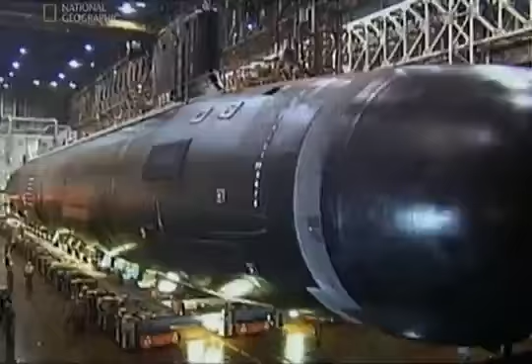The future of submarine warfare is here: the USS Virginia. Tricked out with high-tech capabilities that allow it to sneak up to a coastline and secretly watch and listen to potential enemies, ready to respond with unwavering force.

This mega-sub is in a class of its own: the all-new Virginia class. This is an amazing ship. Named the USS Virginia as the first of a new class, this amazing sub has staggering capabilities. It's the most advanced and versatile submarine in the world. We consider this like the Ferrari of the subclass.

It can launch attacks on other vessels using devastating torpedoes and can deliver cruise missiles 1,600 kilometers inland with pinpoint accuracy.

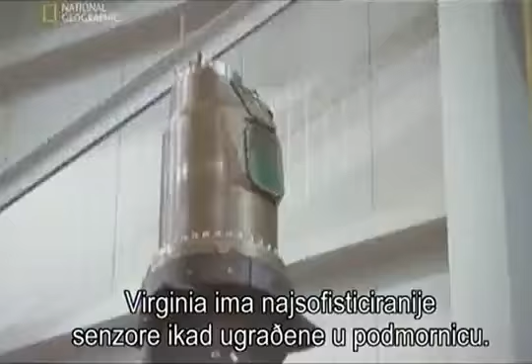To escape potential enemies, the USS Virginia can dive to depths of up to 240 meters. But what elevates this new supreme sub to a class by itself is its astonishing spying ability. This sub has been called the ultimate eavesdropper, and for good reason. The Virginia has the most sophisticated sensors ever fitted on an American submarine. It can see and hear better than any US sub ever built.

But even with such technology, the Virginia must get in close to potential enemies. And she does, extremely close. She uses a revolutionary automatic navigation system, which allows the Virginia to inch itself through shallow waters to an exact coordinate. The question for a Virginia is how slow can you go? How well can you take that 8,000-ton submarine and control it in coastal waters a couple feet off the bottom? Can you move that ship inch by inch?

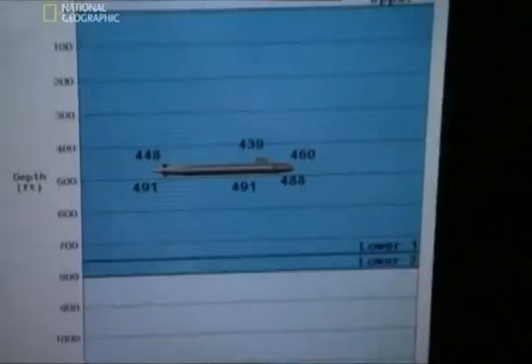Like a stealth fighter, it has the ability to remain undetected. But unlike the stealth, the Virginia can stay motionless underwater for up to 3 months if needed. And we could be sitting there for days and weeks and years and you'd never know we were there. This is a sub like no other.

With such covert potential, the Virginia's intelligence gathering is second to none. It can also deploy elite forces like Navy SEALs at a moment's notice. Such adaptability makes this sub one of a kind.

And the USS Virginia is one heavy sea creature. At 7,800 tons, it weighs as much as 1,600 killer whales. This monster sub is 115 meters from stern to bow. If you were to lay the Statue of Liberty down next to it, the Virginia would still outstretch it by 22 meters.

But how does such a beast move so effortlessly underwater? The dynamic thrust of this megastructure is a nuclear reactor. The design and operation of the reactor is top secret. But what we do know is that it's an astonishing powerhouse.

A compact nuclear reactor converts seawater to steam. The supercharged steam then spins the massive turbines, which in turn propel the sub. The reactor also powers all electrical needs for this high-tech super sub. And what's more, the nuclear reactor on the Virginia has a 30-year lifespan, translation, it can go that long without ever needing to be refueled. That's twice the average lifespan of nuclear reactors on other US attack submarines.

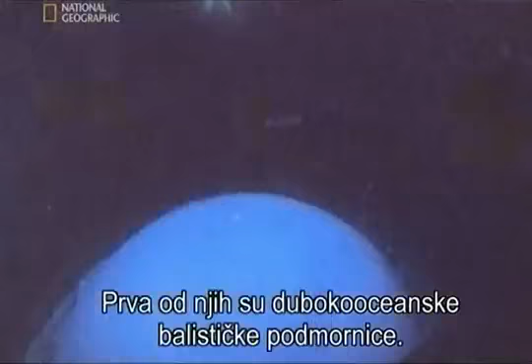The other type is the attack submarine. These are designed to move fast, sink vessels, launch cruise missiles, and gather intelligence.

Before Virginia, the state-of-the-art in attack submarine design was the Seawolf class. The cost to design and build the first Seawolf submarine was over $5 billion US. It was developed during the Cold War for potential deep ocean battles against the mighty Soviet Navy.

But in the early 90s, the political climate dramatically changes. Almost overnight, the Soviet Union collapses. America's archenemy has simply disappeared. The costly arms race between the superpowers is no longer relevant.

In this brave new world, it's inevitable that defense budgets are slashed. Every division of the military is a target for cuts. Submarines like the Seawolf class are simply no longer needed.

As the 1990s develop, new enemies of the United States and her allies emerge. Small terrorist groups in tyrannical countries like Iraq and Somalia cause the military to rethink spending. If you look at the threats we're dealing with today, a lot are coming from third world countries, small countries, where we need to take the battle to them and prepare a battle space around their coastlines. What is the point of a huge navy if these terrorist armies have no sea power? Why does the US Navy need a submarine at all?

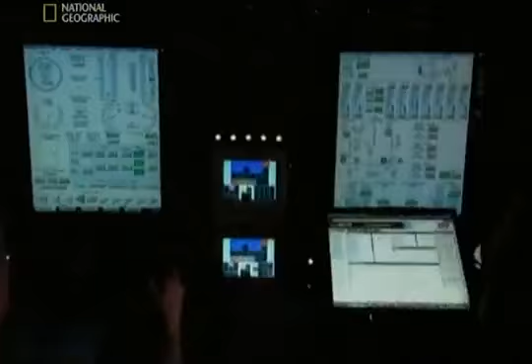In fact, submarines have a lot to offer. The Navy is aware that if they can harness new but unproven technologies, the submarine could remain in shallow waters completely undetected. And what's more, the super spy could stay there for weeks, even months. If a new megasub can listen and stay close to enemy lines, it can still be an important military asset.

In 1995, the US House and Senate finally agreed on the Navy's plan for a new class of attack submarine. But the Navy has set strict guidelines for the submarine designers. The new class of sub must have awesome spy capabilities. She must negotiate shallow waters with pinpoint accuracy. There, she must remain motionless for days on end, regardless of currents and sea drag. She must be able to deploy high-tech weapons to rain on an enemy whenever needed, and she must also be able to dispatch elite special forces like Navy SEALs. The new super sub must have stealth-like maneuverability and be able to disappear underwater for up to 3 months at a time.

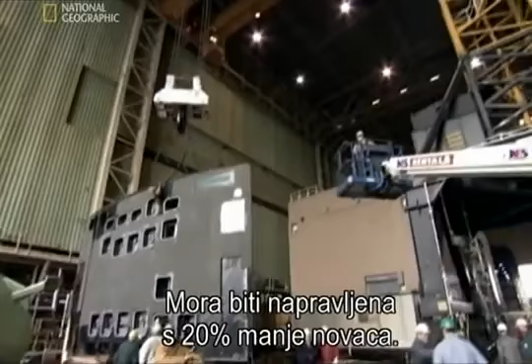It's a tall order by any standards, but there's a catch: they have 1 year less than it took to build the first Seawolf. And incredibly, there's an even bigger catch — it has to be made for 20% less money. With such constraints, there were many in the submarine industry who thought it was simply impossible. I think the reaction is always one of, how can we do that? We've never done it before. If the Navy can make this work, it'll provide a major new weapon in the US arsenal. But if they fail, all US subs could be in question.

It's 1996. The US government needs to get up close and personal with new terrorist enemies. The Navy insists that submarines can still help in this thorny urban war. They claim they can build a new class of submarine — bigger, better, quieter, and more deadly. But there's a catch, a big one: it must be built in less time and for a great deal less money than the previous attack submarine, the Seawolf class. With such limitations, this project looks more likely to sink than float.

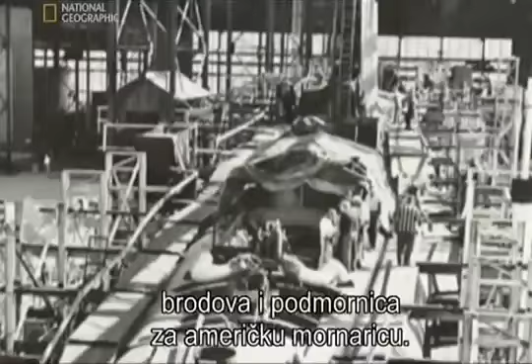The Navy decides to offer the mammoth design challenge to a trusted company, Electric Boat. Based in Groton, Connecticut, this company has enjoyed bragging rights that span over a century of ship and submarine building for the US Navy. The first sub they built was the USS Holland for the Navy in 1900. The USS Holland revolutionized the US Navy, marking the beginning of more than a century of military submarine building. Electric Boat's expertise is second to none, but some government officials already fear that this massive challenge may simply be impossible.

Despite the huge red flag, Electric Boat finally agrees to design and develop the new Virginia class. But to bring it in more cheaply than the Seawolf, they'll have to completely change the way submarines are built.

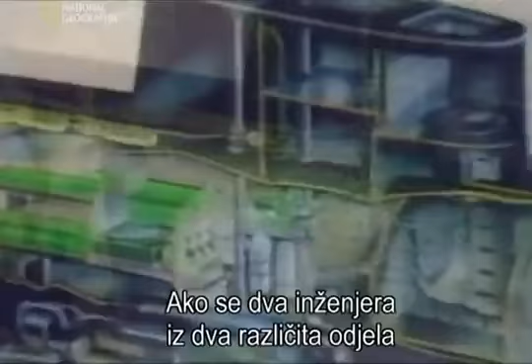It starts with paper and wood. In the past, they would have drawn up initial plans on paper. Previous classes of submarines were designed historically, like probably any other large construction project, with two-dimensional drawings, blueprints. But the problem with two-dimensional plans is that different designers can't always view each other's layouts. If two engineers from different departments end up competing for the same space, it could lead to lengthy and costly delays.

On this tight schedule and budget, there's no room for such error. It'll put the project behind schedule even before it started. It could tip the balance and mean the end of the new super sub.

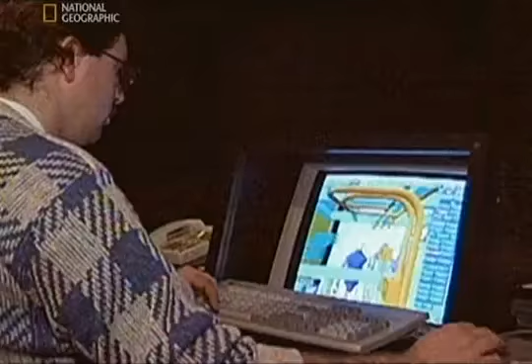The team needs another solution. They turn to new computer-aided technology. The benefit being that the whole model can be seen in 3 dimensions. This will mean that each department can quickly see what the other is doing. If it works, it'll save the company a fortune and help design a more efficient sub. But if it doesn't work, it could mean the new super sub is doomed from the start.

The president of Electric Boat finally decides to take the risk. He came in and finally took all the drafting boards out of the plant and said, okay, go for it on your computers.

Before the Virginia class, when a submarine was designed on paper, builders would then construct a life-sized wood mock-up of the plans just to make sure everything fit. But with the computer-aided design of the Virginia, that step could be skipped. All of the test fitting could be done right there on the screen. It is the first time that a US Navy submarine is completely designed via computer.

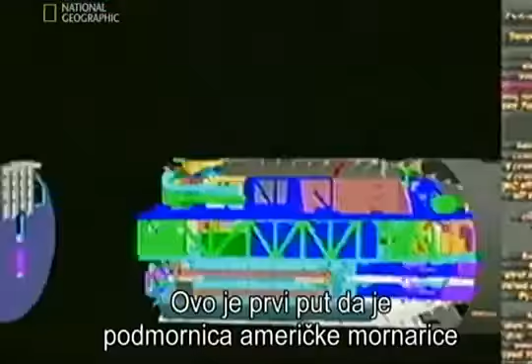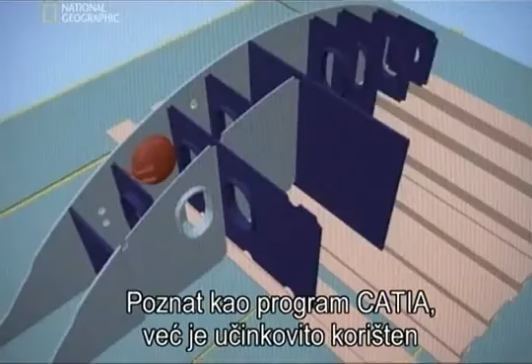And the program that would make this computer-aided design possible is already proven technology. Known as the CATIA program, it has effectively been used in the development of airplanes by the Boeing Corporation. Electric Boat figures there are enough similarities between a plane's fuselage and a submarine to take the plunge.

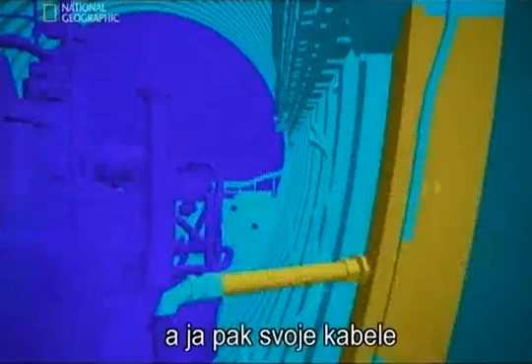It proves to be the right decision. All the various designers have access to the computer 3D model. This allows engineers to work in the same virtual space at the same time. Designers can now view all the plans to make sure they don't interfere with other layouts. The piping designer is running his pipes and I'm running my cables. We can go in and detect interferences day by day.

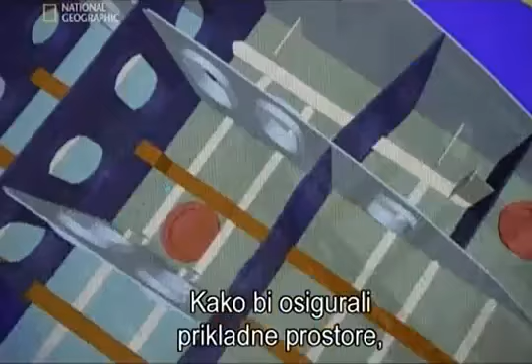Every part of the ship is scrutinized for function and economy. So creating the sub on a computer seems to allow for the more efficient test fitting of systems and parts. But the next challenge facing designers is figuring out how to create spaces for people. Workers need room to do installations, and sailors need space to do their jobs. So in order to ensure those spaces are adequate, designers welcome the help of this guy.

Meet ErgoMan. ErgoMan is a computer-generated image of a human being that comes in 3 virtual sizes: 1.7 meters, 1.8 meters, and 1.9 meters. Whatever movements a human can do, ErgoMan can replicate. Then, when the ergonomically correct envelope has been pushed and movement is made that is not humanly possible, ErgoMan clearly lets engineers know by simply turning that body part red, enabling the designer to adjust the space he's working on.

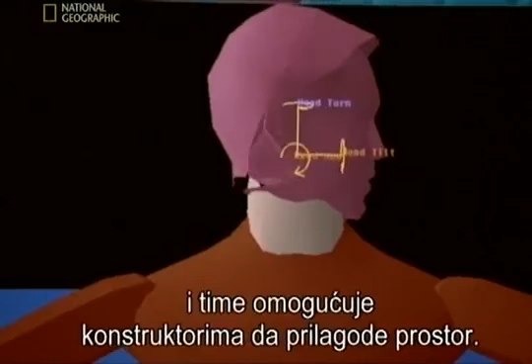This revolutionary technology could save the company millions in costly redesign. It could also guarantee that the crew will operate at maximum efficiency. The computer-aided design also helps in one other crucial way. The future of warfare is uncertain. To meet that uncertainty, this incredible sub must be able to adapt to new situations. As modern warfare changes, so the Virginia must adapt to meet it head-on.

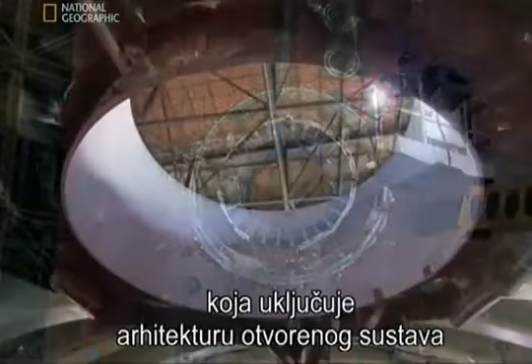To create this adaptability, the designers of this super sub create what's called a modular design that incorporates an open system architecture, meaning the skeletal structure of the sub includes large open spaces. These open spaces can house prefabricated modules such as weapon systems or sonar technologies. These modules can easily be inserted as one complete unit.

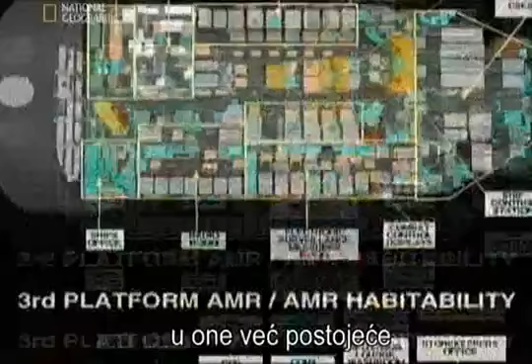This modularity will allow future versions of the Virginia-class to house newly developed systems in the existing Virginia-class layout, without the added expense of having to develop an entirely new class of submarine to house new technologies and capabilities. A remarkable cost-cutting development in the design of a submarine. If it works, this will be the most extraordinary submarine commanding the world's oceans. But designing it is just one problem. Making this ambition a reality is quite another.

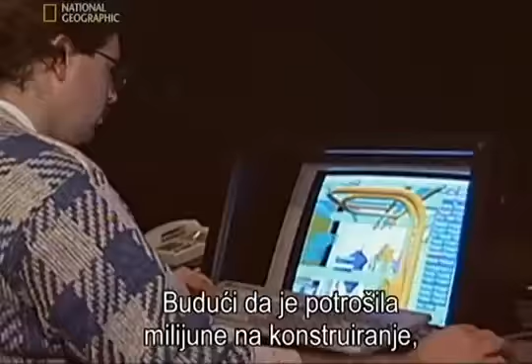With an even tighter budget than past submarines, this is going to be a massive challenge to execute. And now there's a new problem. Having spent millions on the design, the Navy may not have enough money left to build it. It looks like the prototype of the new Virginia class may never surface.

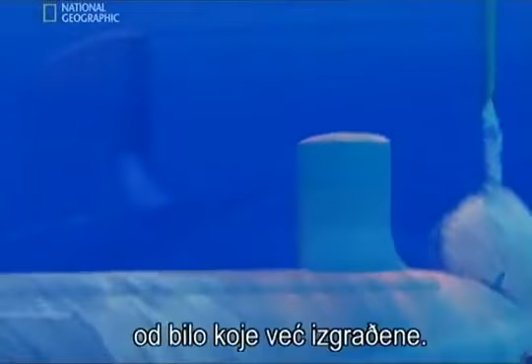The Navy is underwriting an enormous new project to build a new class of submarine that'll be more versatile than any ever built. But it has to be constructed in less time and for less money than the previous attack submarine, the Seawolf. The design and development have been skillfully and successfully carried out by Electric Boat. And for the first time, a US Navy submarine is completely designed via computer. It's a massive achievement, but there's a problem.

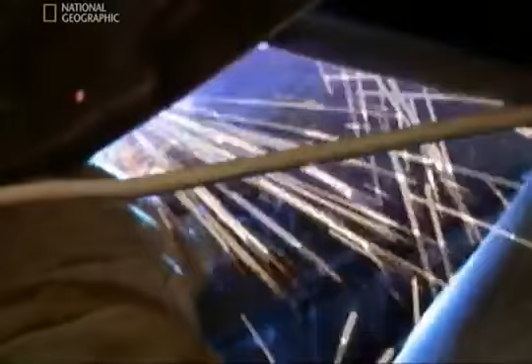The Navy's budget for the Virginia program is running out. It could lead to the end of the new super sub before it's even floated. But then Electric Boat does something unprecedented in its history.

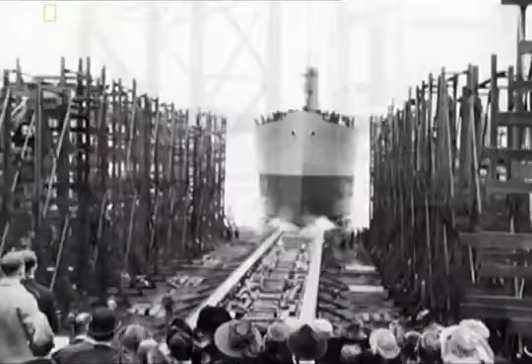For years, Electric Boat has been in competition with Northrop Grumman's Newport News, another heavy hitter in the shipbuilding industry. Now Electric Boat proposes that they combine forces with their old rivals and do something that's never been done before: build the submarine together, a process they call teaming. They figure that combining resources and brainpower will allow them to work more quickly and more efficiently.

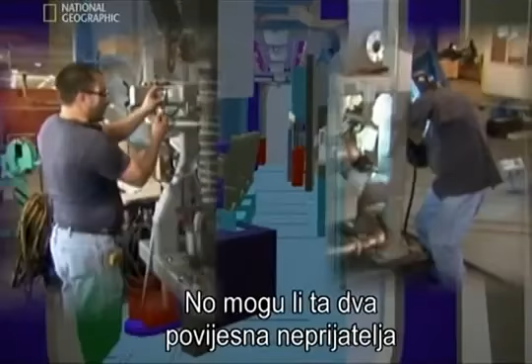The proposed alliance can lead to massive savings, $700 million off the cost. But can these two historic adversaries put aside their differences and build a super sub for a reduced price? How can they manage such a massive project across two companies? As we've said, it's never been done before. But the Allied companies must make it work. They have little choice as the Navy has no more money to offer.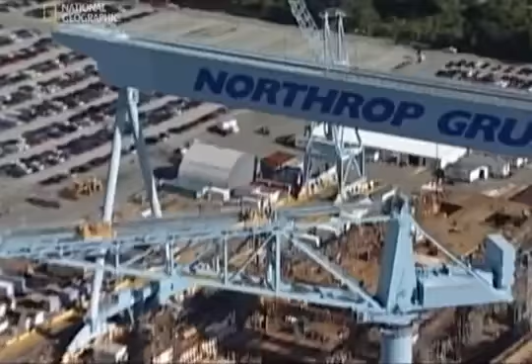Making a super sub for less money and in less time than previous attack subs will only be possible if the two rivals collaborate. It's a colossal and dangerous undertaking. If they get it wrong, it could spell the end of the US submarine program.

This is a time when the Navy must prove a submarine's worth in a changing world. The two-company alliance agrees that the only way to meet such demands is that there can be no delays. A major setback could erase any cost savings. But such efficiency in submarine construction is unprecedented. Is this project simply too ambitious? Could it be destined for the deep?

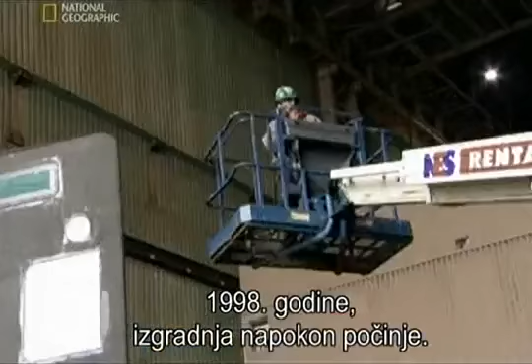In 1998, construction finally begins. Like all submarine building, it begins with the most crucial component, the hull. This is where the crew and weapons are housed. If it's not strong enough, the lives of hundreds of men are at stake, as is the multi-billion-dollar submarine. Not just a costly mistake, it would be a national catastrophe.

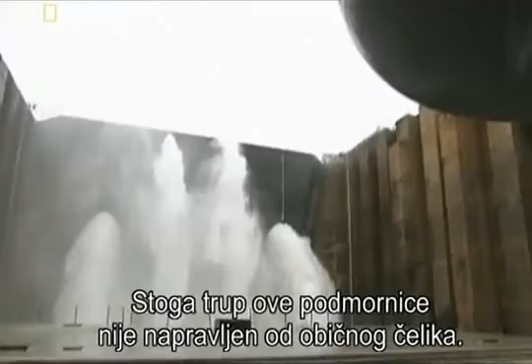Consequently, the hull for this sub isn't just made out of simple steel. It must resist unbelievable pressure. The Virginia class needs to reach depths up to 240 meters. Here, it's difficult for an enemy to find them. It'll give the submarine maximum safety from attack or detection.

But at these depths, there's immense pressure. The steel hull must withstand a massive 26 kilograms of force per square centimeter. That's the equivalent of a dinner plate strong enough to hold up to the weight of an elephant.

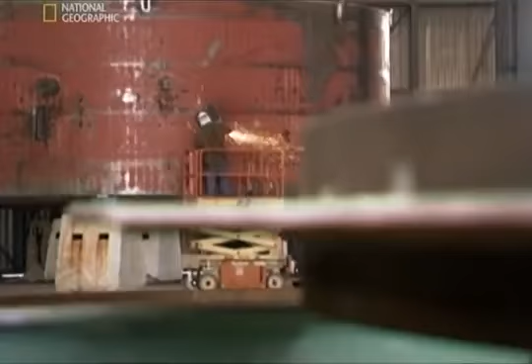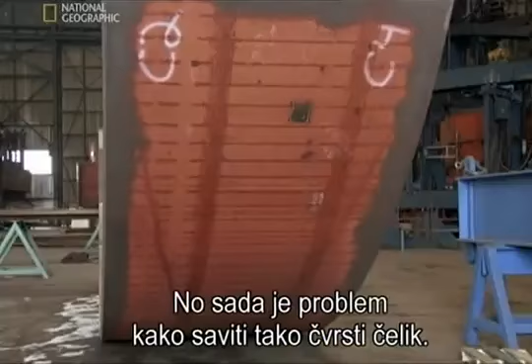Getting the steel strong enough to endure such pressure is crucial. The manufacturing of this special metal is a military secret, but suffice to say, it's strong. Extremely strong. But now the problem is how to bend such heavy-duty steel.

They use a machine that supplies up to 4,500 tons of pressure. That's over 30 times the pressure exerted by this car-crushing machine. The massive drum shapes and bends the huge plates of steel. Once bent into shape, the steel is mounted onto rib-like frames. It's then welded together into cylinders.

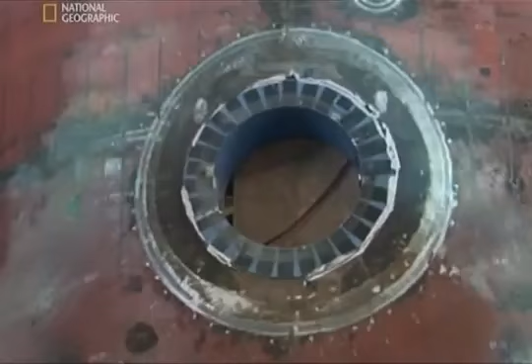This is a critical moment. In the past, this was done by teams of hand welders. But such are the stresses on a deep ocean submarine that even one bad weld could lead to disaster. There's only one answer: robots.

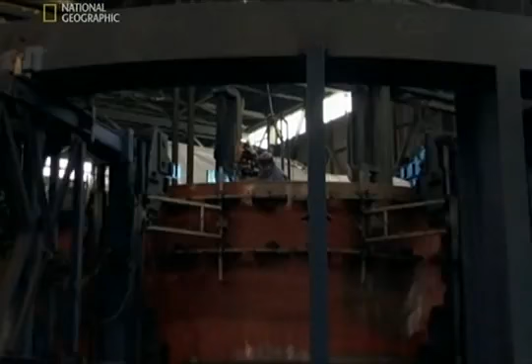These assembly robots can work round the clock and rarely make mistakes. The weldments that go in out here are better than 99% first-time yield, which means the inspection process is less than 1% failure rate. It's a costly business, but this is something that can't afford to fail at any price.

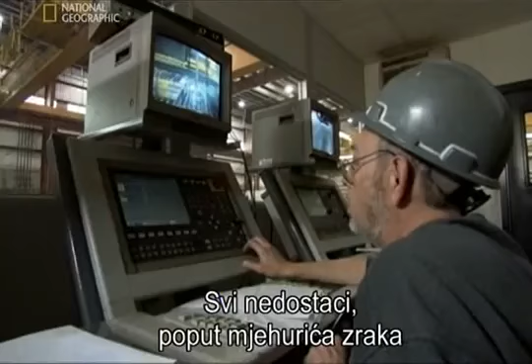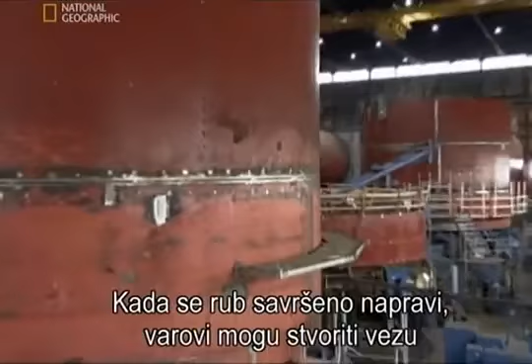To make sure the welds are perfect, they're inspected by X-ray. Any imperfection, such as an air bubble in the weld seam, could be just enough for the hull to weaken. It could then give way to the crushing forces exerted deep below the surface. If the X-ray machine shows up any imperfection, it's meticulously repaired. Amazingly, once the seam is perfect, the welds can create a bond that is actually stronger than the original steel. A comforting fact when you're 240 meters below sea level.

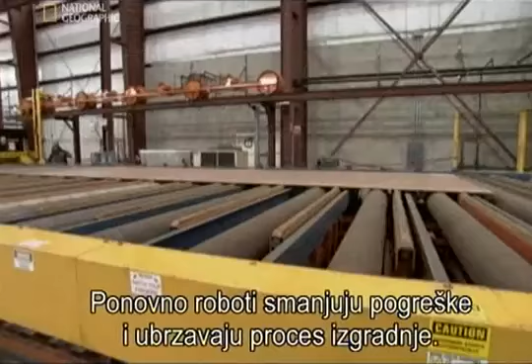Once the separate sections of the hull have been created, they start to construct the skeleton. Here in steel processing, they'll make floors, walls, and all the sections that comprise the submarine's framework. Again, robotic manufacturing reduces mistakes and speeds up the process. This is crucial when the alliance companies are desperate to cut costs and time.

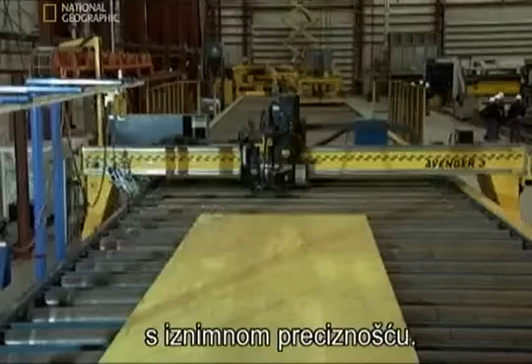Today, modern technology works with electronic data that comes right over the line and feeds the machines. This incredible laser marker is one of a new generation of robotic assembly tools, designed to eliminate human error. It's programmed to follow the computer design with better than pinpoint accuracy. It's basically the only marker of its kind in the free world that we're aware of.

But will this new technology work? It's never been used in submarine construction before. The machine passes quality control with flying colors, making it just one of many innovations in building this unique sub. So far, the project is going well.

Now the marked steel must be cut. But how do you cut such strong steel? They use a hugely powerful cutting machine known as an abrasive water jet, where a constant stream of water acts as the propellant for 80 grit flecks of garnet, which cut through the steel.

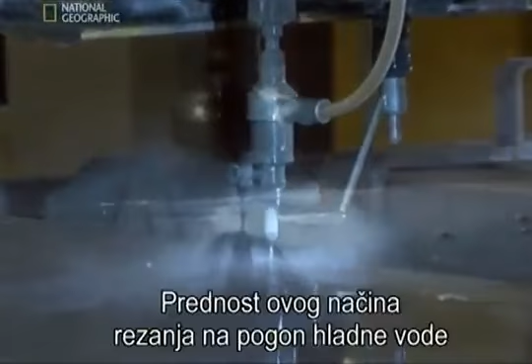The advantage to this method of cutting with a cold water propellant is that there is no heat-affected zone, thereby eliminating imperfections caused by expansion, contraction, and melting. Even though garnet is not the hardest abrasive that could be used, it's seen as optimal because it's hard enough to cut without causing too much wear and tear on the water jet's nozzle.

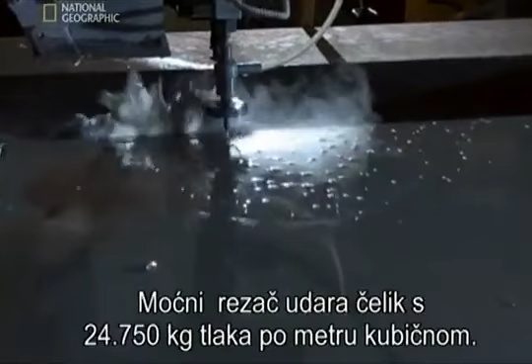The powerful cutting stream strikes the steel with 3,900 kilograms of force per square centimeter, strong enough to cut through a 30-centimeter thick piece of steel. Once cut, the sections are ready to be welded into place, making up the submarine's skeletal shape.

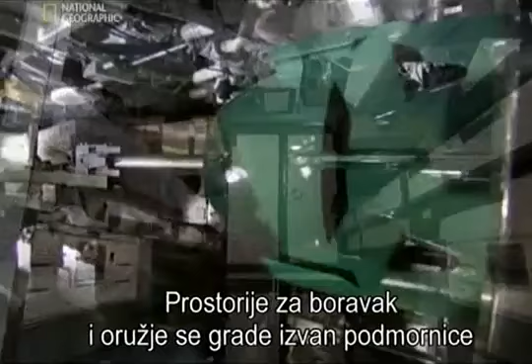While these sections are being built, other important modular sections are constructed in tandem. Living quarters and weapons are built outside the submarine before final assembly. This allows ease of construction, and each module can be rigorously tested before installation.

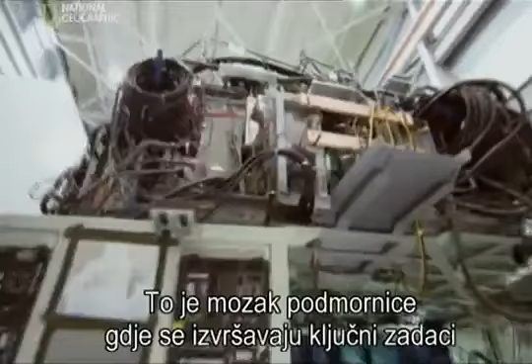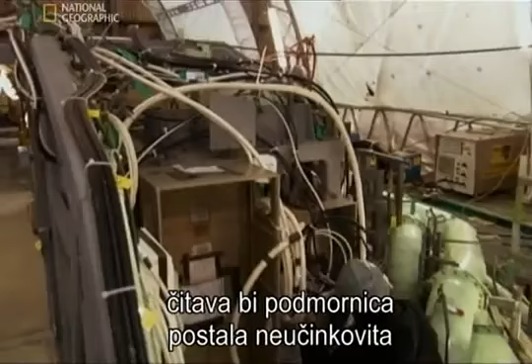The Virginia's command and control module is the most complex module to be built. It's the brain of the sub, where crucial functions are executed and surroundings are monitored. It's also where the awesome weapons systems are controlled. If any part of this goes wrong, the whole submarine could be rendered inoperative and end in a voyage to the bottom of the sea.

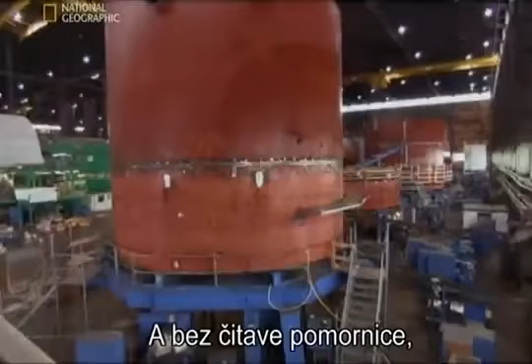So the Virginia's separate elements, the modular systems, the internal structures, and the outer hull are built with efficiency. But these separate sections have not yet been integrated into a complete submarine. And without a complete submarine, the sailors destined to serve on the Virginia can't set foot onto it and get a feel for its inner workings. Yet they must have a working knowledge of the Virginia's unique operating systems when they're charged with manning the complete submarine.

So how do sailors prepare for duty on board this unfinished sub? The Navy would have to get creative to ensure that the human element of this mega-sub, the US Navy submariner, would also be finely tuned for service. This is when the mission could sink or swim.

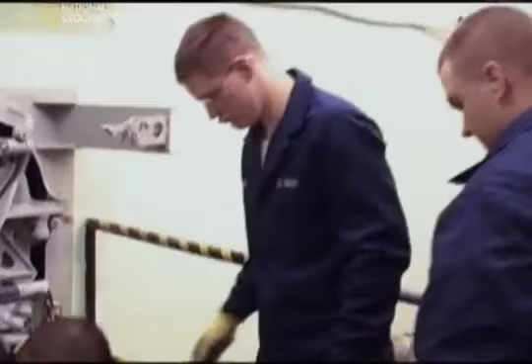The USS Virginia is a super sub in the making. Nothing like it has ever been built before, so there's no chance of gaining crew experience from other submarines. But the new sub must be fully tested before sea trials, and that includes the crew. To operate this new class of submarine will require unique training. But this is a virgin sub, and no one knows all its workings. Like the rest of this project, this too will be a challenge for the Navy to resolve.

Training begins with every submariner's nightmare, in mock facilities like this fake engine room, built to simulate a flood. Even though these men are not on an actual sinking sub, this scenario is very real to them. They know that a flood could happen when they're at sea, and the only way to survive it is to stop the water from rushing in. Flooding in the engine room!

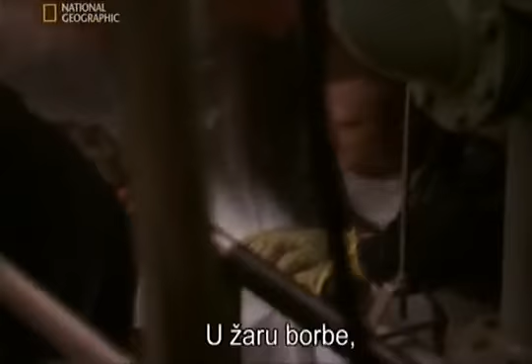When a sub starts flooding, it becomes a race against possible death for everyone on board. Flood control has been activated in the engine room. Phones are manned in damage control central. In the heat of battle, the sub can't resurface because the enemy will spot it.

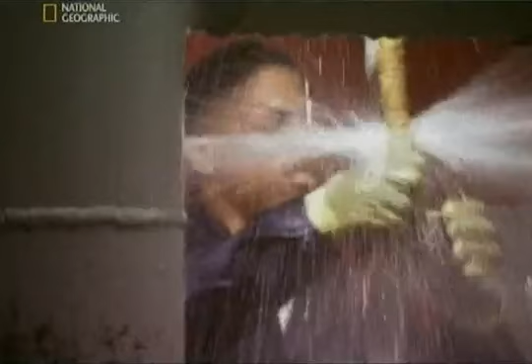If too much water gets in, the sub takes on too much weight, permanently ditching itself on the ocean floor. The men cannot escape through the hatch because they're so deep, the water pressure will crush them. If they can't stop the leaks, they will be trapped at the bottom of the ocean, buried alive in an iron coffin.

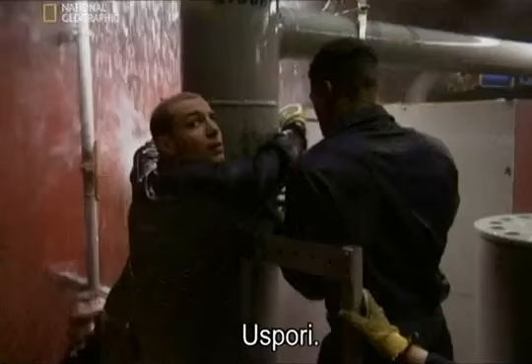These sailors are under the close scrutiny of their commanders. Slow down. To block small leaks in pipes, the sailors hold plugs in place with rope they call bandit twine. For larger leaks, they patch the holes with rounded metal plates called strongbacks, which are secured with metal straps simply called bandits. Don't take it apart, tie it up.

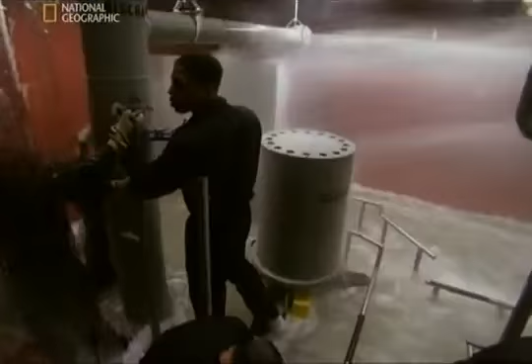Commanders expect the sailors to keep their cool and keep their focus. Fortunately, after a rigorous and stressful series of tests, these sailors get the thumbs up from their commanders. These are good men to be spending months on end with, and that's what a sub is all about—living in cramped conditions and still functioning well in the face of danger. This is no place for claustrophobics.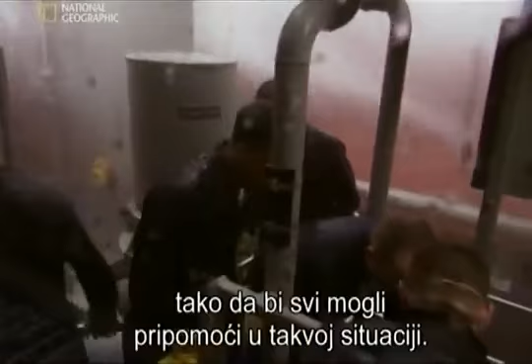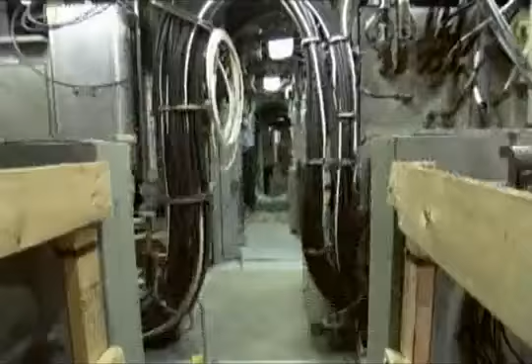Every sailor on board the USS Virginia, as well as any Navy sub, whether commanding officer or cook, must know how to mitigate against leaks so that all hands can be helpful should such an emergency arise. But submariners must do more than train for emergencies. They must also train for their specific jobs, such as steering or sonar operations. This requires familiarity with the sub's operating systems.

Sonar and navigation have traditionally been kept separate due to noise factors. Using new technology and space-saving design, these two disciplines have been brought into one central command post for the very first time. When we first started, it was overwhelming, because traditionally the fleet returning sonarmen who came to the Virginia had a mindset of the way things used to be, where we were in a room separate from everyone. We could set up the sounds we needed to hear in our room and no one else was distracted by them. But before sea trials begin, the specialist crew must get familiar with working together.

With little alternative, the Navy agrees to invest in building a simulator. Every detail of this high-tech simulator is a functioning replica of the future sub's control room. This is a very unique trainer that's specifically for the Virginia class.

One thing sonar operators on the new sub will have to get used to is working alongside their colleagues. Sonar has always been monitored in separate rooms to avoid noise interference. But sonar operators destined for the Virginia must get used to working in the new shared space of the control room.

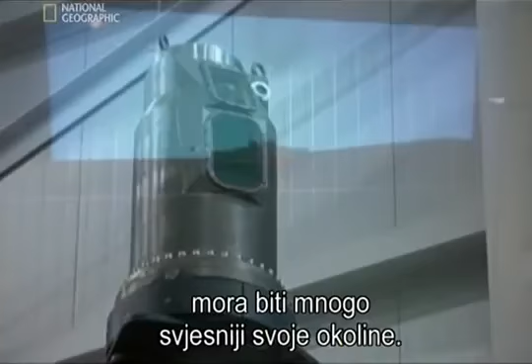But the ultimate eavesdropper needs to be much more aware of her surroundings. Instead of a periscope, she has a mast with multi-sensors and cameras that enable images from all sides. These sensors, known as photonics, are wired to various monitors in the control room. For the first time in submarine history, everyone in the control room monitors surface activity, and because they're all in the same room, communication is much more responsive. Control, and I'll brief them that we've gained an enemy warship.

While the crew is being put through their paces, construction of this super sub nears its end. The separate hull sections are outfitted with the internal elements they'll house, and then they're pieced together section by section until a full-length submarine finally emerges.

By August 2003, the USS Virginia is ready for the water. Against all odds, the alliance companies have done it. They've built an extraordinary new submarine, more technologically advanced than any in the world. It's an amazing achievement. Right now, any celebration could prove to be premature. Unless they get the next and most important phase right, the whole project could become an expensive flop.

Virginia must now endure extensive sea trials. The super sub has to prove itself where it really counts, in the ocean. Often in the past, testing new subs has uncovered countless problems, proving time-consuming and extremely costly. The USS Virginia has been built using revolutionary methods, and time and vast quantities of money have been shaved off the budget. But if this new super sub is to succeed, there can be no slip-ups during trials. It'll knock the whole project off course.

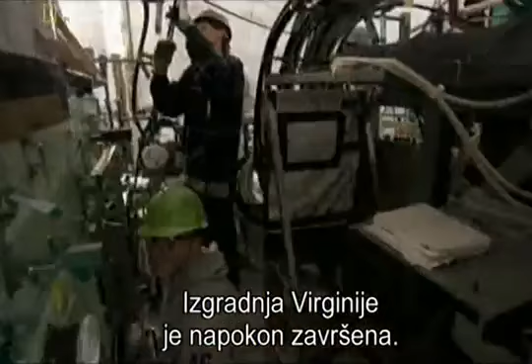The construction of the all-new USS Virginia is at last complete. It's taken 6 years and cost the Navy billions of dollars to build, but still less time and money than its predecessor, the Seawolf. It's a mammoth achievement, but by itself, it's meaningless. The real test lies ahead.

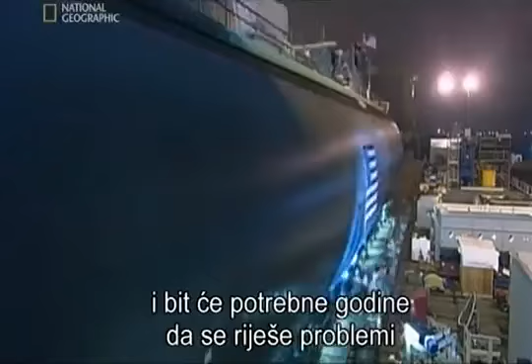If there are errors now, the huge investment could sink to the depths. It could take years to fix any problems that surface, likely putting the project beyond economic sense. It could even spell disaster for the whole submarine division. In the past, problems have been common at this stage, but this project simply can't afford to fail. It's now do or die for the new Virginia class.

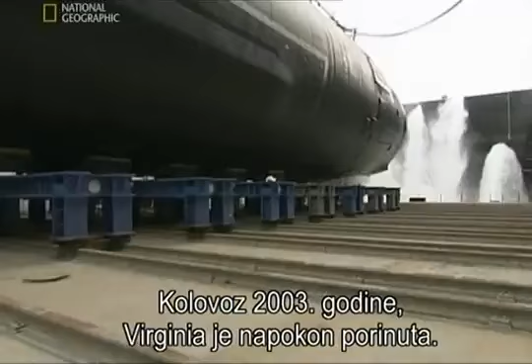August 2003. The USS Virginia is finally launched. Over the next several months, they will put the sub through extensive tests known as alpha trials. This is when things can, and often do, go wrong. Previously, subs would factor in time for repairs, but in this new economic climate, the Navy and the Alliance simply don't have that luxury. The Virginia must ace the test.

Historically, the first ships of a class wind up with significant problems. As the USS Virginia heads out on her maiden voyage, the captain and crew will begin testing all her major functions. All the sub's technology must be tested.

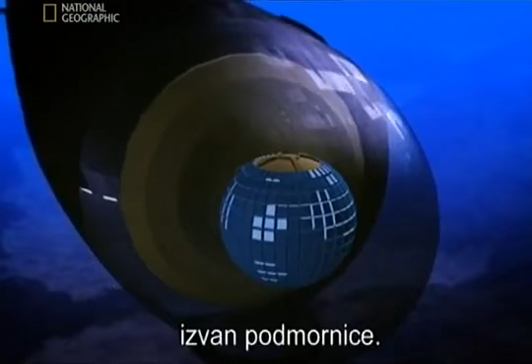They start with sonar. It is the traditional way a submarine sees, even through murky water. The system is based on transmitting and receiving. The main feature is the sonar sphere, housed in the nose cone, lined with hundreds of hydrophones that act as the ears of the sub. These are called passive sensors, and their job is to listen to all sounds coming from outside the sub. A giant baffle protects the sonar sphere from internal noise interference.

The sonar sphere also has active sonar capabilities, releasing noise pulses and gathering a clear picture of the sub's surroundings based on the bounce back of sound waves. Along with the sphere at the bow, there are 6 side-mounted sonars, 3 on each side, providing a more complete picture of the submarine's surroundings. There's also sonar that can be released from the back of the sub and towed with a line, covering the area behind the sub often referred to as the blind spot, which would otherwise be vulnerable to attack.

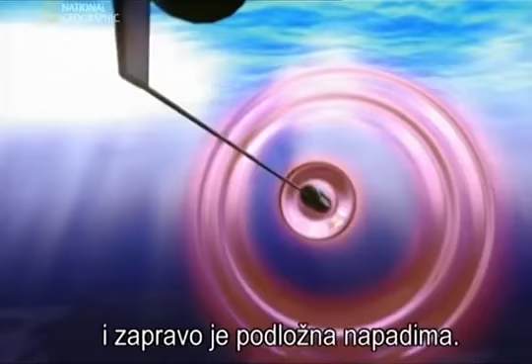Because the Virginia is built to operate in shallow waters near coastlines, it is likely to encounter minefields set up by enemy forces to keep Navy ships out of their waters. These mines are typically scattered throughout the water, anchored into position with chains. Because of this danger, the USS Virginia is the first submarine in the fleet to house a chin array, which works in combination with a sail array to provide a better picture of what lies ahead and make it more effective at spotting mines, so they can be avoided or detonated from a safe distance.

The sonar system passes through the stringent test with flying colors.

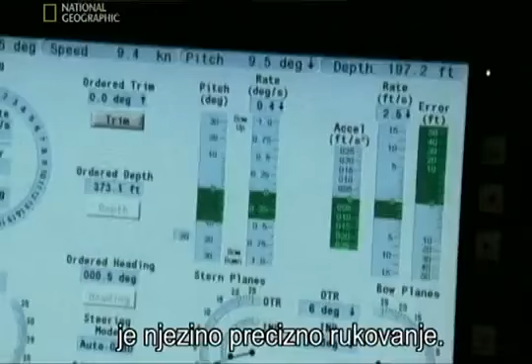Another defining characteristic of the Virginia class that makes it highly adapted for these shallow water environments is its precision handling. Just like any submarine, it uses a propulsor to adjust speeds.

Rudders and planes are used to steer the ship, and the Virginia, like all submarines, uses buoyancy to go up and down. To go down, air is released from ballast tanks, and seawater flows in, weighing the submarine down and causing it to sink. To go up, pressurized air is pumped into the ballast tanks, forcing seawater out, making the sub lighter and causing it to rise.

Water can also be pumped throughout various trim tanks on the sub to keep it in balance. These tools are universal to US Navy subs, but what's unique about the Virginia class is that they are all dialed into a central program.

So when we set the course and set the depth, it stays at that depth and that course until we change it. If the Virginia were to park itself on the ocean floor, currents and tides would cause it to drift. But the Virginia's automated hovering capabilities allow it to maintain its position near the ocean floor, compensating for currents and tidal forces. The Virginia's unique ability to remain locked into position provides another major innovation.

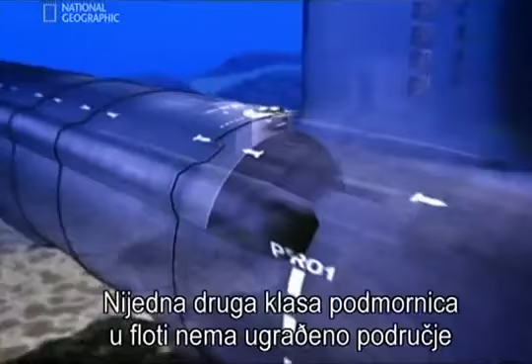As the sub can remain in a fixed position, it's easy for elite forces like Navy SEALs to swim in and out of the escape hatch. No other US submarine has a more effective way of deploying special forces. No other class of submarine in the fleet has a built-in Navy SEAL staging area. This 9-man lockout trunk allows an entire team of SEALs to exit and enter the sub.

Once out, they grab mission-specific supplies from lockers located in the fin-like structure on the top of the submarine, known as the sail. And then they're ready to make their quiet approach to land.

And if the Navy SEALs need fire cover, there's more than enough on board. The Virginia comes fully armed. There are 12 rocket launchers for firing Tomahawk cruise missiles. A target up to 1,600 kilometers away can be strategically destroyed. 4 torpedo launch tubes are ready and armed to eliminate any surface threat.

But when it needs to, the Virginia can simply disappear. To remain stealthy and avoid detection, the Virginia is designed to maneuver in total silence. The Virginia-class sub has a giant duct around its propulsor for noise reduction. And the entire hull structure is covered with a rubber-type coating designed to make it more hydrodynamic.

It's much like driving your car at high speed down the highway. If you have the windows rolled down, you can't hear the radio because of all the air noise blowing by you. Much like Virginia, when we're driving fast with all this flow noise, we can't hear from our own sensors. So we want to quiet down the ship as much as possible, make her hydrodynamically smooth, so there's not a lot of flow noise, so we can hear from our own sensors what's out there.

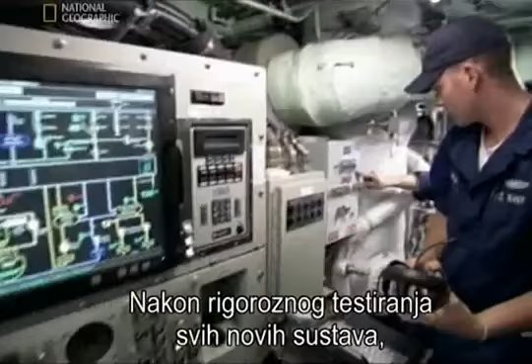After rigorous testing of all the new systems, technologies, and crew members, at last the alpha trials are over. To everyone's amazement and utter relief, the USS Virginia has passed the alpha trials with a clean sweep.

And it was great to see it return after alpha trials and understand from the 4-star admiral getting off that ship that it performed flawlessly, that he was very pleased with its design. They came back with a broom on the sail, which to us signifies a clean sweep. A clean sweep means the ship passes every facet of the test.

It is one of many stellar performances. All the trials that I've accomplished since in command have been a great success. The ship has exceeded its expectations in every trial. This truly is a remarkable design.

Normally, when a nuclear-powered submarine is built, a year of testing and then another year of repairs are built into the schedule. But because the Virginia performed so well during testing, that year of repairs is not necessary. Everybody pitched in, and it was a tremendous effort. It was a great program to be part of, and I'm most proud of the people that made it happen.

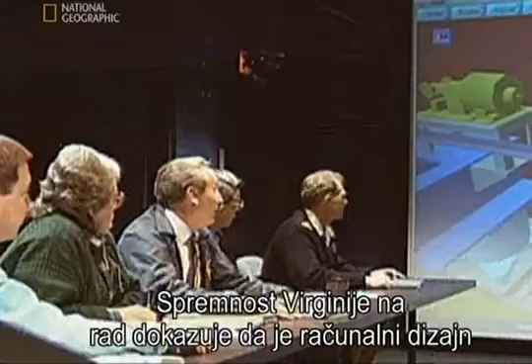The USS Virginia is hailed a landmark achievement in submarine history. The design and build of the Virginia is so successful, it could be put into service a full year ahead of schedule. The Virginia's readiness for service proves that the computer-aided design approach to creating a new class of submarine is the way to go. And that new technologies, combined with the resources of two rival shipbuilding companies working as a team, can yield an affordable submarine with new capabilities.

When parked in shallow waters near coastlines, it can support ground force operations and participate in land-based military activities. New capabilities allow this new class of submarine to be more than a warship built to engage enemy navies in the open ocean.

The USS Virginia, the first of the Virginia-class submarines. The conflicts that this new breed of submarine are destined to face over the course of the next few decades are unforeseeable, and many of its missions may never be known, because they're likely to be top secret. What is known is that whatever its destiny, the USS Virginia is poised to answer the call of duty.